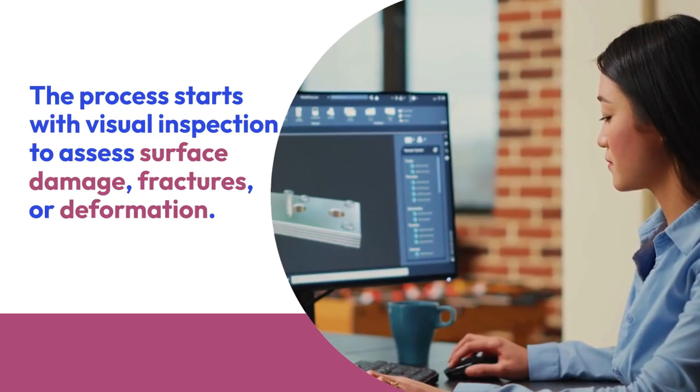2. How do you perform a failure analysis on a mechanical component? Failure analysis on a mechanical component involves a systematic investigation to determine the root cause of failure. The process starts with visual inspection to assess surface damage, fractures, or deformation. Next, data such as service history, operating conditions, and material specifications are collected. Non-destructive testing methods like X-ray, ultrasonic, or dye penetrant may be used to detect hidden flaws.

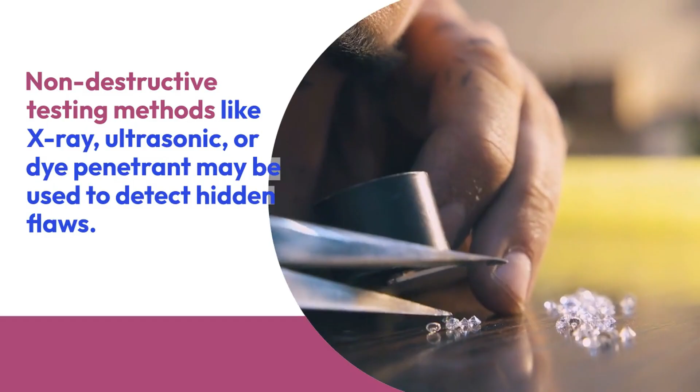After that, destructive tests such as hardness testing, tensile tests, and metallographic analysis can be performed to evaluate material properties. Fractography using scanning electron microscopy helps identify fracture mechanisms, like fatigue, overload, or corrosion. Once all data is analyzed, the failure mode and cause are identified. Finally, recommendations are made to prevent future failures, such as design changes, material upgrades, or improved maintenance procedures. This approach ensures reliability and safety in mechanical systems.

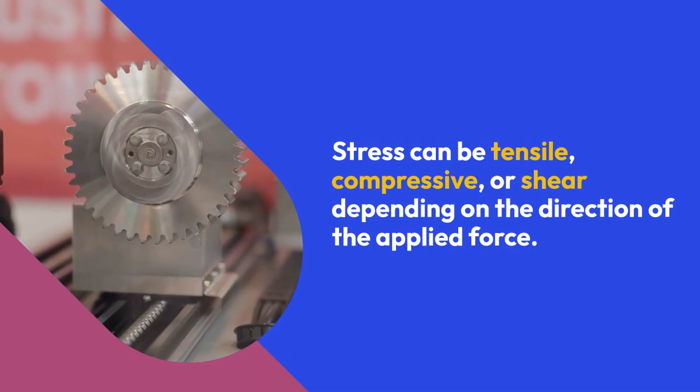3. Explain the difference between strain and stress. Stress and strain are fundamental concepts in mechanics used to describe how materials respond to external forces. Stress is the internal resistance a material develops per unit area when subjected to a force. It is measured in units like pascals (Pa), and is calculated as stress = force / area. Stress can be tensile, compressive, or shear depending on the direction of the applied force.

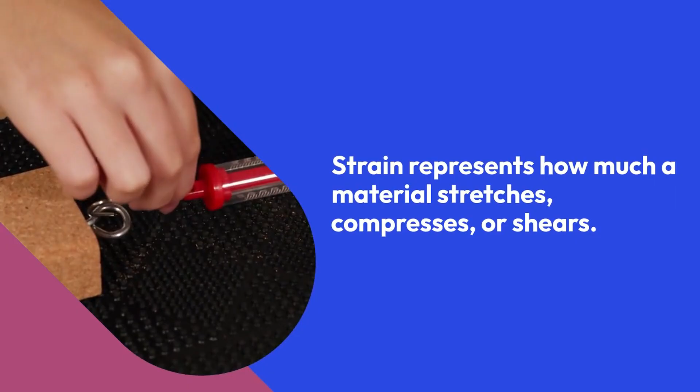Strain, on the other hand, measures the deformation or displacement a material undergoes due to stress. It is a dimensionless quantity, calculated as strain = change in length / original length. Strain represents how much a material stretches, compresses, or shears. In simple terms, stress is the cause (force applied), and strain is the effect (deformation observed). Understanding both is essential for designing safe and reliable mechanical structures.

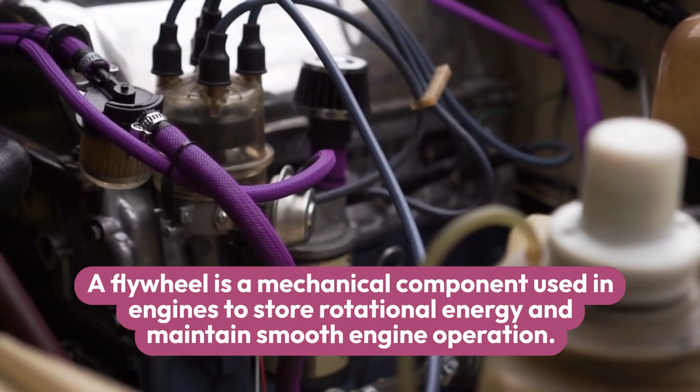4. What is the function of a flywheel in an engine? A flywheel is a mechanical component used in engines to store rotational energy and maintain smooth engine operation. Its primary function is to regulate the engine's speed by minimizing fluctuations during the power strokes. In an internal combustion engine, the power is generated in pulses, which can cause uneven motion. The flywheel absorbs energy during the power stroke and releases it during the non-power strokes, ensuring continuous and balanced rotation

of the crankshaft. It also aids in starting the engine by providing initial inertia and helps maintain momentum between cycles. Additionally, the flywheel connects to the clutch in manual transmission vehicles, playing a crucial role in engaging and disengaging the engine from the drivetrain. Overall, it enhances engine efficiency, reduces vibration, and contributes to a smoother driving experience.

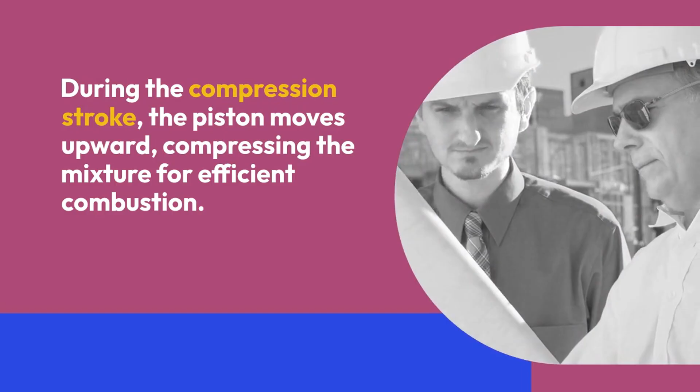5. How does a 4-stroke engine work? A 4-stroke engine operates through 4 distinct strokes: intake, compression, power, and exhaust to complete one combustion cycle. In the intake stroke, the piston moves downward, drawing in an air-fuel mixture through the intake valve. During the compression stroke, the piston moves upward, compressing the mixture for efficient combustion. In the power stroke, a spark plug ignites the compressed mixture, causing an explosion that forces the piston downward, generating

mechanical power. Finally, in the exhaust stroke, the piston moves upward again, pushing burnt gases out through the exhaust valve. This entire cycle occurs over 2 revolutions of the crankshaft. The 4-stroke design provides better fuel efficiency, smoother operation, and cleaner emissions compared to 2-stroke engines. It's widely used in cars, motorcycles, and other internal combustion engine-powered machines.

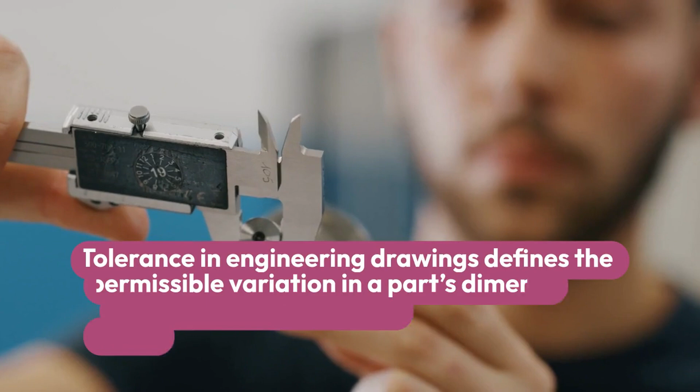6. What is the role of tolerance in engineering drawings? Tolerance in engineering drawings defines the permissible variation in a part's dimensions, ensuring that manufactured components function correctly despite minor deviations. It specifies the acceptable upper and lower limits for measurements, such as length, diameter, or angle.

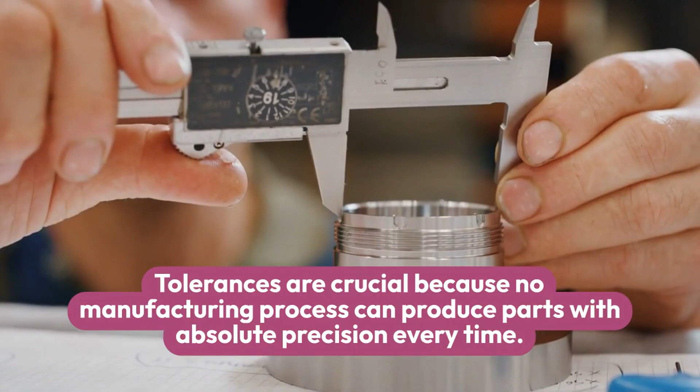Tolerances are crucial because no manufacturing process can produce parts with absolute precision every time. By setting clear tolerance limits, engineers ensure that parts will fit and operate together without failure, even if slight differences exist. Proper tolerance selection balances functionality, cost, and manufacturability. Tight tolerances increase precision but also raise production costs.

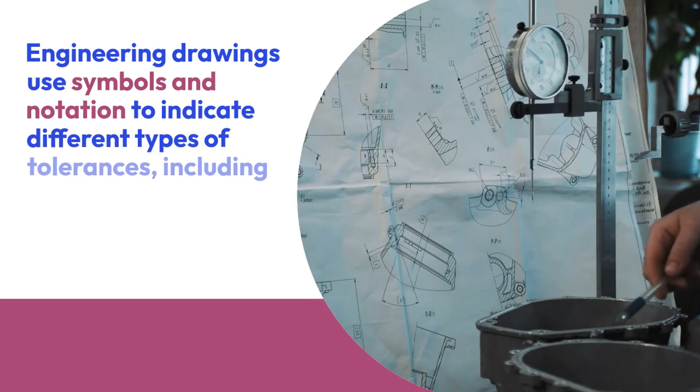Engineering drawings use symbols and notation to indicate different types of tolerances, including dimensional, geometric, and surface finish. Ultimately, tolerances ensure product quality, reliability, and interchangeability, which are essential for mass production, assembly, and long-term performance of mechanical systems.

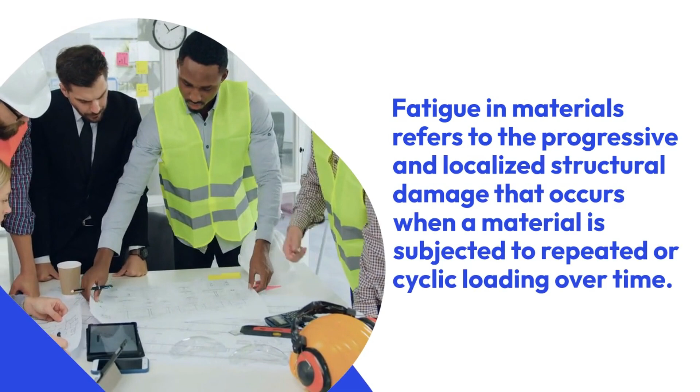7. Explain the concept of fatigue in materials. Fatigue in materials refers to the progressive and localized structural damage that occurs when a material is subjected to repeated or cyclic loading over time. Even if the applied stresses are below the material's ultimate tensile strength, repeated stress can cause microscopic cracks to initiate and grow. Over thousands or millions of cycles, these cracks expand, eventually leading to sudden and unexpected failure.

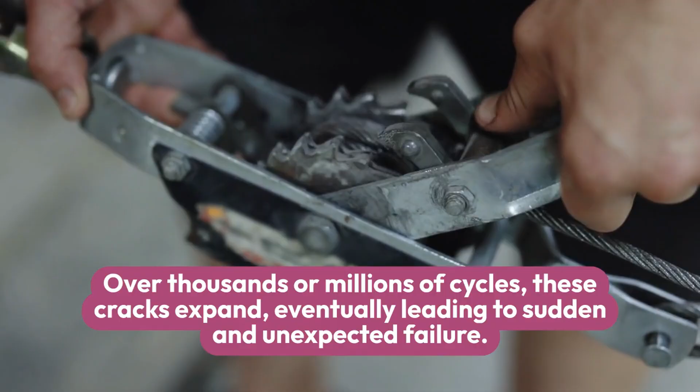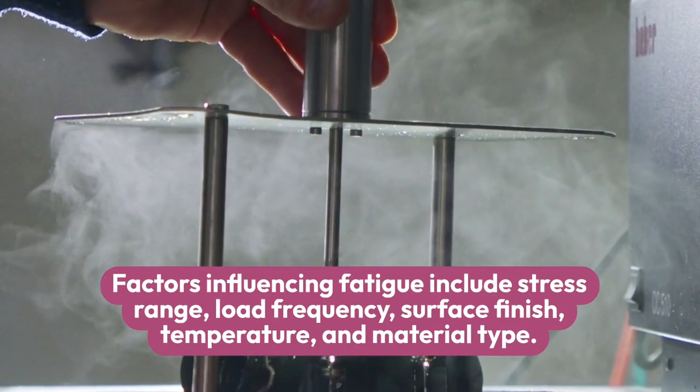Fatigue is especially critical in components exposed to constant vibration, such as aircraft wings, bridges, or engine parts. Factors influencing fatigue include stress range, load frequency, surface finish, temperature, and material type. Engineers use S-N curves, stress versus number of cycles, to predict a material's fatigue life.

Designing against fatigue involves stress reduction, material selection, surface treatments, and regular inspections. Understanding fatigue is essential for ensuring the long-term reliability and safety of mechanical systems.

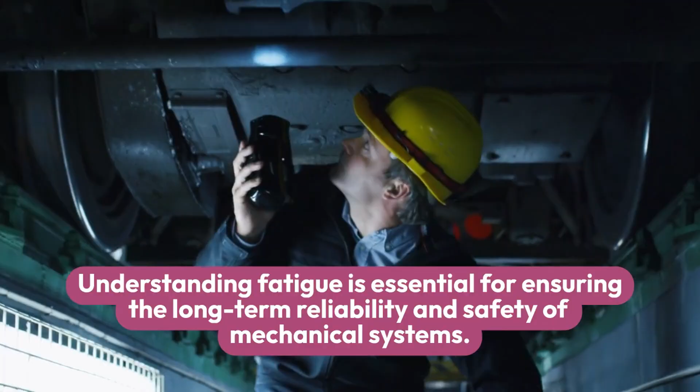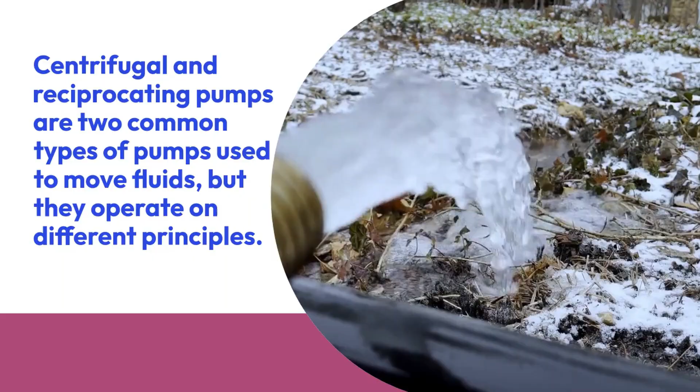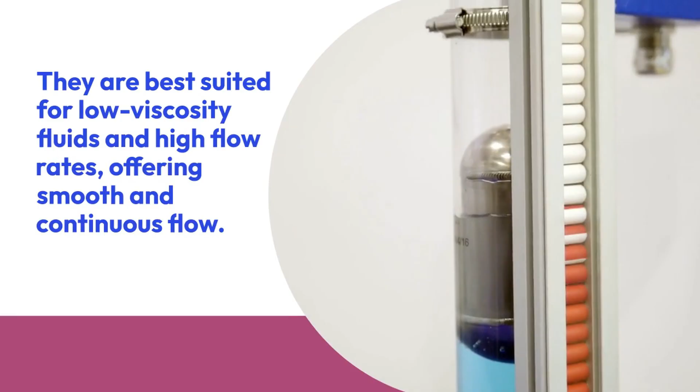8. What is the difference between centrifugal and reciprocating pumps? Centrifugal and reciprocating pumps are two common types of pumps used to move fluids, but they operate on different principles. Centrifugal pumps use a rotating impeller to impart kinetic energy to the fluid, converting it into pressure energy. They are best suited for low-viscosity fluids and high flow rates, offering smooth and continuous flow. Centrifugal pumps are simpler, cost-effective, and require less maintenance, making them ideal for water supply, irrigation, and chemical processing.

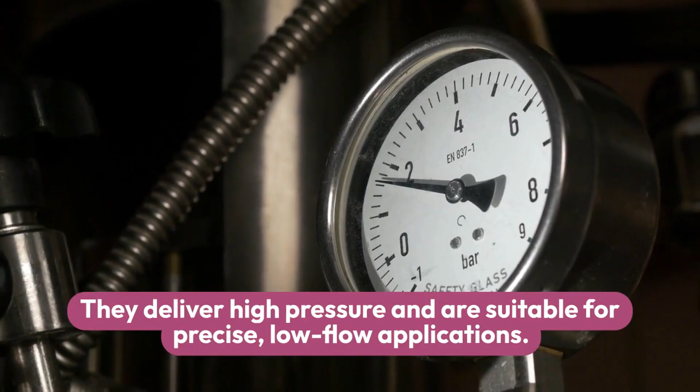Reciprocating pumps, on the other hand, use a piston or plunger to displace fluid through a chamber. They deliver high pressure and are suitable for precise, low-flow applications. These pumps are often used in oil drilling, hydraulic systems, and industries requiring accurate dosing. While more complex and maintenance-intensive, reciprocating pumps provide consistent flow regardless of pressure variations.

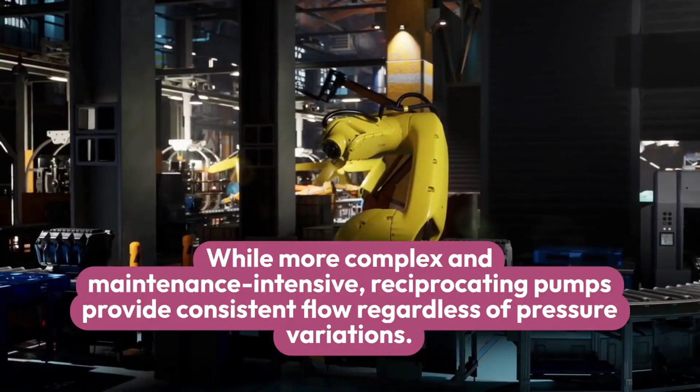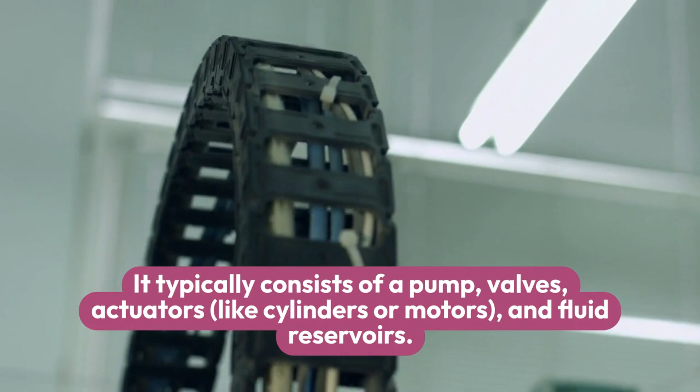9. Describe the working principle of a hydraulic system. A hydraulic system operates on Pascal's law, which states that pressure applied to a confined fluid is transmitted equally in all directions. The system uses an incompressible fluid, usually oil, to transfer force from one point to another. It typically consists of a pump, valves, actuators, like cylinders or motors, and fluid reservoirs.

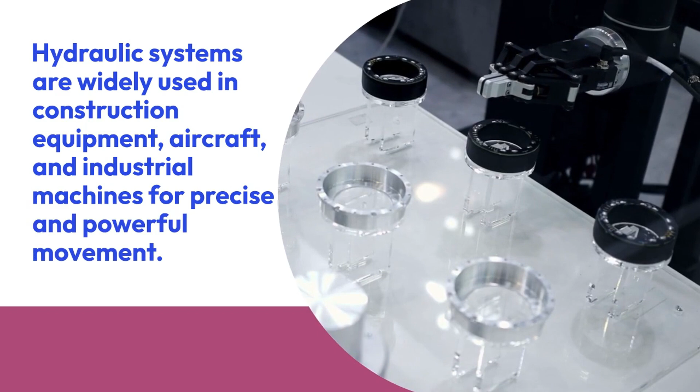When the pump pushes fluid into the system, it creates pressure. This pressurized fluid flows through control valves to actuators, where it converts the fluid's pressure energy into mechanical force or motion. For example, when fluid enters a hydraulic cylinder, it pushes the piston, creating linear motion. Because fluid pressure is consistent throughout the system, even small input forces can be amplified to produce large output forces. Hydraulic systems are widely used in construction equipment, aircraft, and industrial machines for precise and powerful movement.

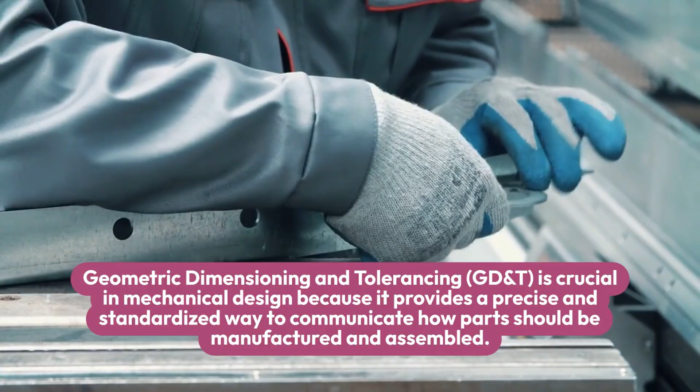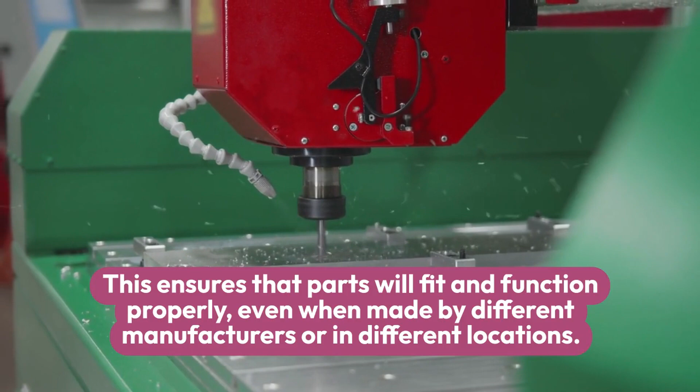10. What is the importance of GD&T in mechanical design? Geometric dimensioning and tolerancing, GD&T, is crucial in mechanical design because it provides a precise and standardized way to communicate how parts should be manufactured and assembled. Unlike traditional dimensioning, GD&T defines not just size but also form, orientation, location, and runout tolerances. This ensures that parts will fit and function properly, even when made by different manufacturers or in different locations.

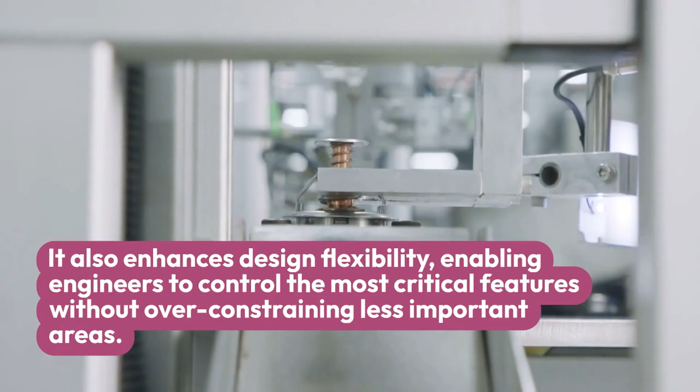GD&T improves quality control by reducing ambiguity and allowing for more accurate inspection. It also enhances design flexibility, enabling engineers to control the most critical features without over-constraining less important areas. This leads to cost savings in manufacturing and fewer errors during assembly. By using symbols and feature control frames, GD&T promotes a clear, concise, and universal language for engineers, machinists, and inspectors, improving communication across all stages of product development.

11. How would you select a material for high-temperature applications?

Selecting a material for high-temperature applications involves careful consideration of several critical factors to ensure performance, safety, and longevity. The primary criterion is the material's ability to retain its mechanical properties, such as strength and hardness, at elevated temperatures. Materials like stainless steels, nickel-based superalloys, ceramics, and refractory metals are often chosen for such environments.

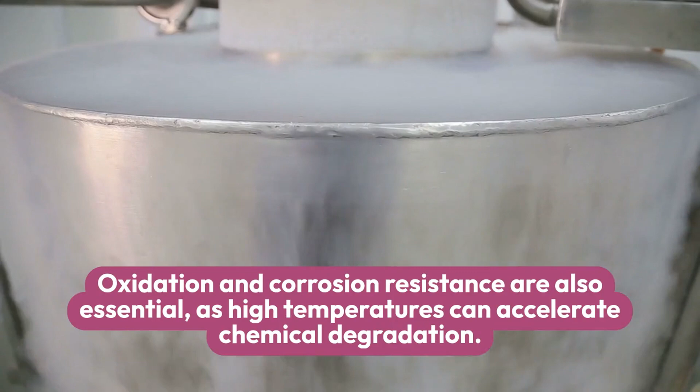Oxidation and corrosion resistance are also essential, as high temperatures can accelerate chemical degradation. Thermal conductivity, thermal expansion, and creep resistance must be evaluated to prevent deformation or failure over time. Additionally, the material should be compatible with other system components and the surrounding environment. Cost, availability, and manufacturability are also important considerations.

Engineers often refer to material property charts, testing data, and standards to make an informed decision that balances performance with economic efficiency. 12. What is the difference between laminar and turbulent flow?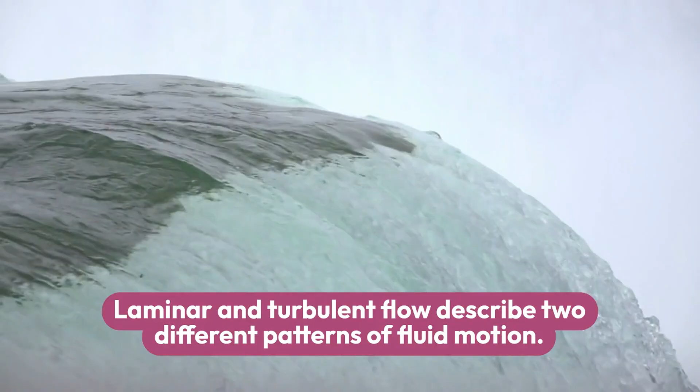Laminar and turbulent flow describe two different patterns of fluid motion. Laminar flow is smooth and orderly, where fluid particles move in parallel layers with minimal mixing. It typically occurs at low velocities and in fluids with high viscosity. In laminar flow, the velocity profile is parabolic, and there is little to no disruption between the layers, resulting in reduced energy loss and noise.

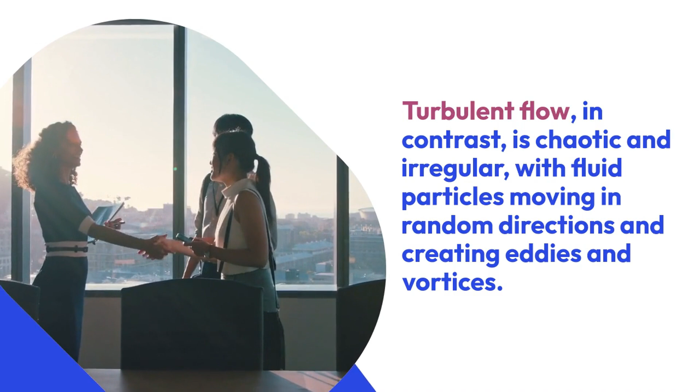Turbulent flow, in contrast, is chaotic and irregular, with fluid particles moving in random directions and creating eddies and vortices. It usually occurs at high velocities or with low viscosity fluids. Turbulent flow has a flatter velocity profile and increases energy loss due to internal friction and mixing.

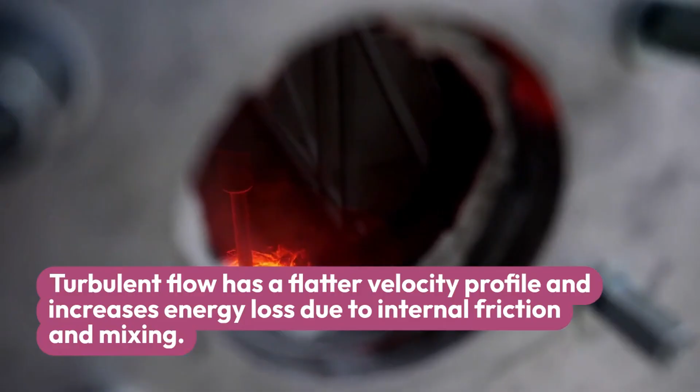The Reynolds number helps predict the type of flow: laminar when below 2000, and turbulent when above 4000. Understanding both is vital in designing efficient fluid systems. 13. Explain the working of a heat exchanger.

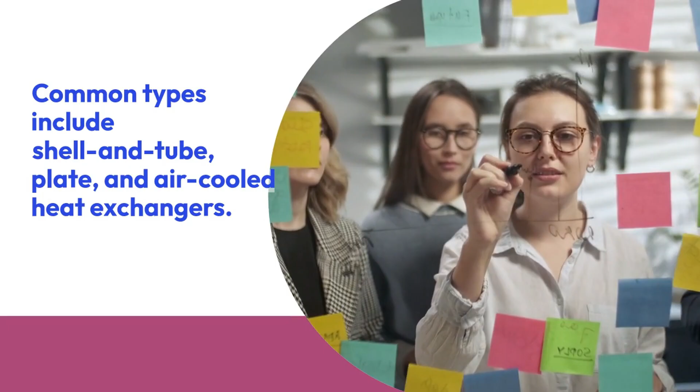A heat exchanger is a device used to transfer heat between two or more fluids without mixing them. It works on the principle of thermal conduction and convection, allowing heat to flow from a hotter fluid to a cooler one. Common types include shell and tube, plate, and air-cooled heat exchangers. In a shell and tube design, one fluid flows through tubes while another flows around them in a shell, exchanging heat across the tube walls.

In plate heat exchangers, thin metal plates increase the surface area for efficient heat transfer. Heat exchangers are widely used in industries like power generation, HVAC, automotive, and chemical processing. They improve energy efficiency by recovering waste heat or preheating fluids.

Proper design ensures maximum heat transfer, low pressure drop, and long-term reliability, making heat exchangers essential for thermal management in engineering systems. 14. What are the different types of bearings and their uses?

Bearings are mechanical components used to reduce friction between moving parts and support loads. There are several types of bearings, each suited to specific applications. Ball bearings use balls to minimize friction and are ideal for light to moderate loads, commonly found in electric motors, fans, and wheels. Roller bearings use cylindrical rollers to handle heavier radial loads, used in conveyor belt rollers and gearboxes.

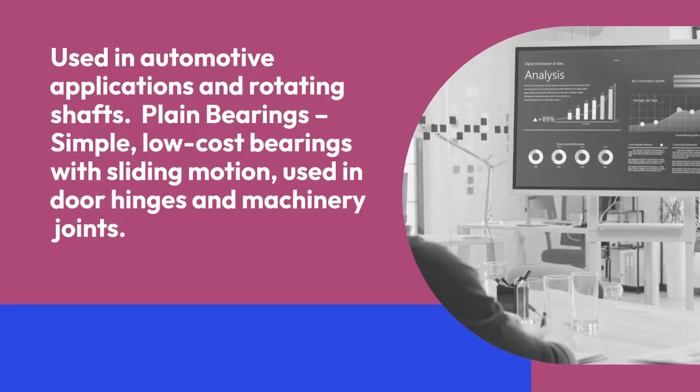Tapered roller bearings handle both radial and axial loads, widely used in vehicle axles and machine tool spindles. Needle bearings contain long, thin rollers, ideal for compact spaces with high load capacity. Thrust bearings are designed to handle axial loads, used in automotive applications and rotating shafts. Plain bearings are simple, low-cost bearings with sliding motion, used in door hinges and machinery joints. 15. How do you calculate the efficiency of a machine?

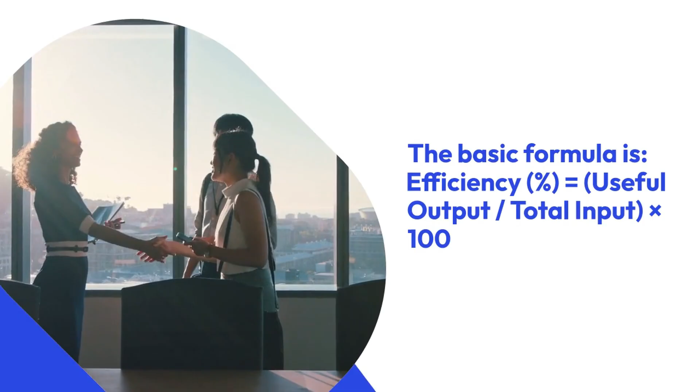The efficiency of a machine is calculated by comparing the useful output energy or work to the total input energy or work, typically expressed as a percentage. The basic formula is efficiency (%) = (useful output / total input) × 100. For example, if a machine uses 500 joules of energy to perform 400 joules of useful work, the efficiency would be 400/500 × 100 = 80%.

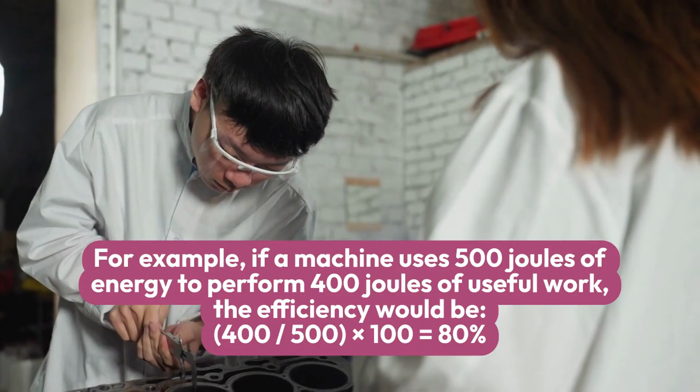Efficiency indicates how well a machine converts input energy into useful work. No real machine is 100% efficient due to energy losses from friction, heat, or sound. Improving efficiency often involves reducing these losses through better design, lubrication, or material selection. Engineers use efficiency to assess machine performance, compare alternatives, and identify opportunities for optimization, especially in systems like engines, motors, and turbines. 16. Describe the process of welding and its types.

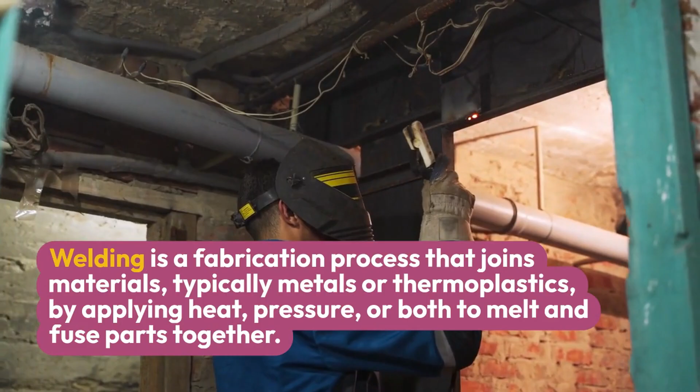Welding is a fabrication process that joins materials, typically metals or thermoplastics, by applying heat, pressure, or both to melt and fuse parts together. The process may or may not use filler material to strengthen the joint. There are several types of welding, each suited to specific applications.

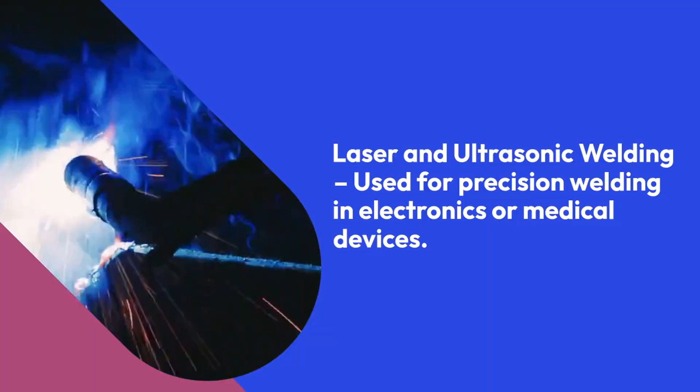Arc welding uses an electric arc to generate heat. It includes methods like MIG, metal inert gas, and TIG, tungsten inert gas, welding. Gas welding uses a flame produced by burning gas, like oxyacetylene, to melt the base metal. Resistance welding involves passing electric current through the metal to generate heat at the joint. Laser and ultrasonic welding are used for precision welding in electronics or medical devices. Each type offers specific advantages in terms of strength, speed, and precision.

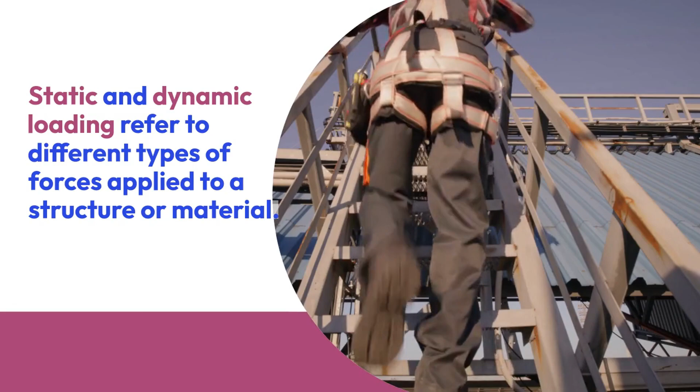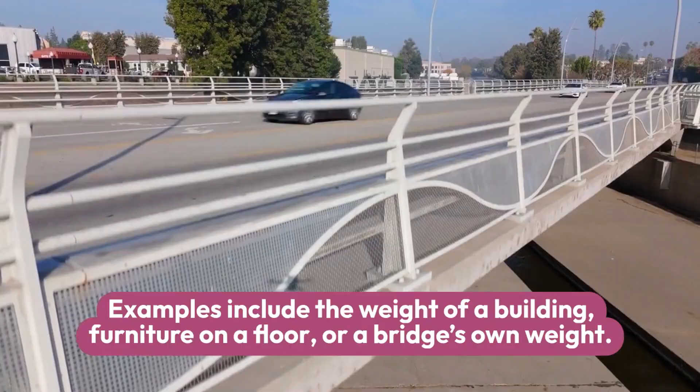17. What is the difference between static and dynamic loading? Static and dynamic loading refer to different types of forces applied to a structure or material. Static loading involves forces that are applied slowly and remain constant or change very gradually over time. Examples include the weight of a building, furniture on a floor, or a bridge's own weight. These loads do not cause rapid motion or vibration, allowing for predictable stress distribution.

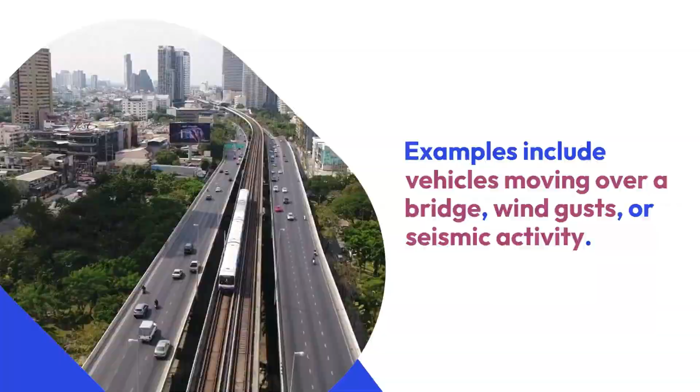Dynamic loading, on the other hand, involves forces that vary rapidly with time and may include motion, impact, or vibration. Examples include vehicles moving over a bridge, wind gusts, or seismic activity. Dynamic loads can cause fatigue, resonance, and additional stresses due to acceleration or momentum. Designing for dynamic loads requires more complex analysis to ensure safety and durability. Understanding the difference is essential for creating reliable and efficient mechanical and structural systems.

18. What is the purpose of a pressure relief valve? A pressure relief valve is a safety device designed to protect equipment and systems from excessive pressure buildup. Its primary purpose is to automatically release fluid, gas, or liquid when the internal pressure exceeds a preset limit, preventing potential damage, explosion, or failure. Pressure can rise due to factors like thermal expansion, blocked flow, or equipment malfunction.

The valve opens at the set pressure, allowing excess fluid to escape and reducing the pressure back to safe levels. Once normal conditions are restored, the valve closes again to maintain system integrity. Pressure relief valves are essential in boilers, pipelines, chemical plants, compressors, and hydraulic systems. They ensure compliance with safety regulations and protect both machinery and personnel. Proper selection, installation, and maintenance of these valves are critical to ensuring reliable and safe operation in any pressurized system.

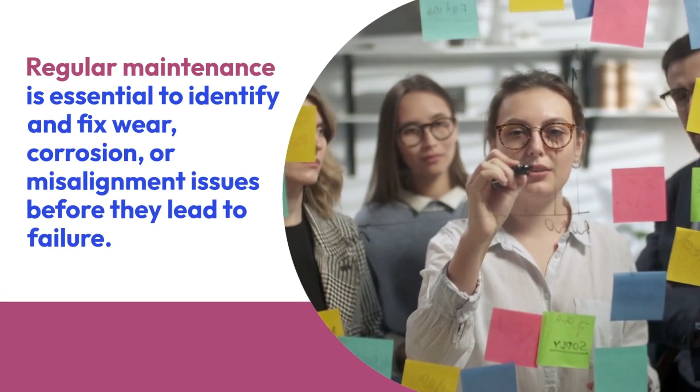19. How do you ensure the safety of mechanical systems? Ensuring the safety of mechanical systems involves a combination of design, maintenance, testing, and monitoring practices. The process starts with using reliable design standards and material selection suitable for operating conditions like load, temperature, and pressure. Safety features such as guards, emergency shutoffs, and pressure relief valves are integrated to protect users and equipment. Regular maintenance is essential to identify and fix wear, corrosion, or misalignment issues before they lead to failure.

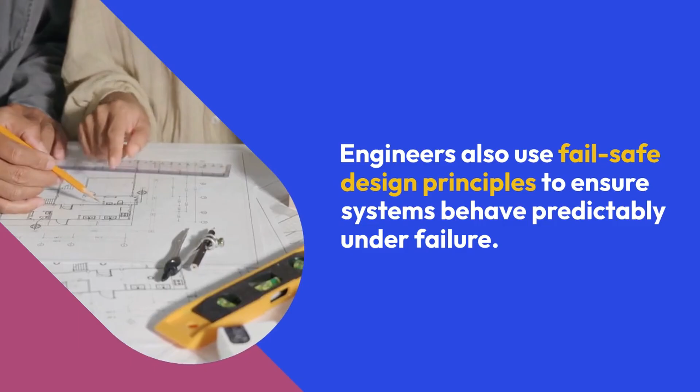Inspections and testing, such as non-destructive testing, NDT, verify the integrity of components. Engineers also use fail-safe design principles to ensure systems behave predictably under failure. Proper training for operators and clear safety protocols help minimize human error. Compliance with safety regulations and standards, like ISO or OSHA, further ensures systems are reliable, efficient, and safe for operation.

20. Why should we hire you as a mechanical engineer? You should hire me as a mechanical engineer because I bring a strong combination of technical knowledge, practical experience, and a proactive attitude. I have a solid foundation in core engineering principles such as mechanics, thermodynamics, and materials science, along with hands-on experience in CAD design, simulations, and project management. I excel at solving complex problems, working collaboratively in team environments, and meeting project deadlines with efficiency and precision.

My ability to adapt quickly, continuously learn, and stay updated with industry trends allows me to contribute innovative ideas and improve system performance. I am passionate about engineering and committed to delivering high-quality work that meets both technical and safety standards. My strong communication skills also enable me to clearly convey technical concepts, making me a valuable asset to cross-functional teams and engineering projects.